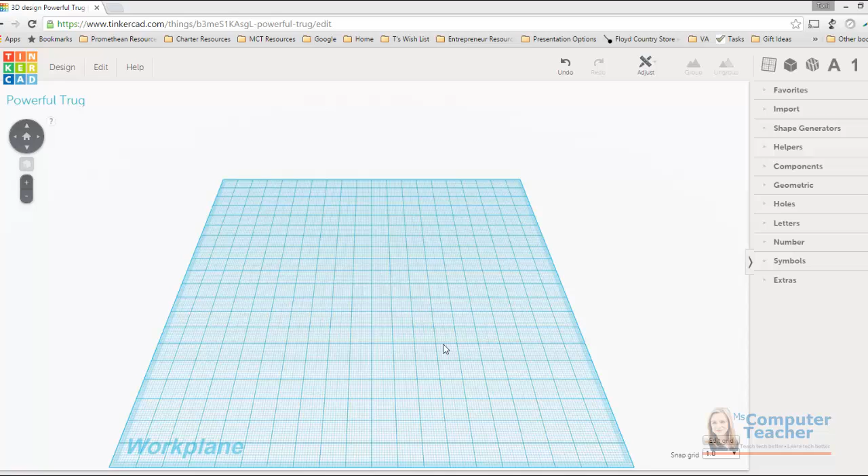Now that we know how to log into Tinkercad and we have explored the Tinkercad interface, we can go ahead and start creating our box. So the first thing we're going to do is come over here in the Shapes panel and grab our box. We can click this down arrow for geometric, or we could click up here. I'm going to grab the box and drag it onto the work plane.

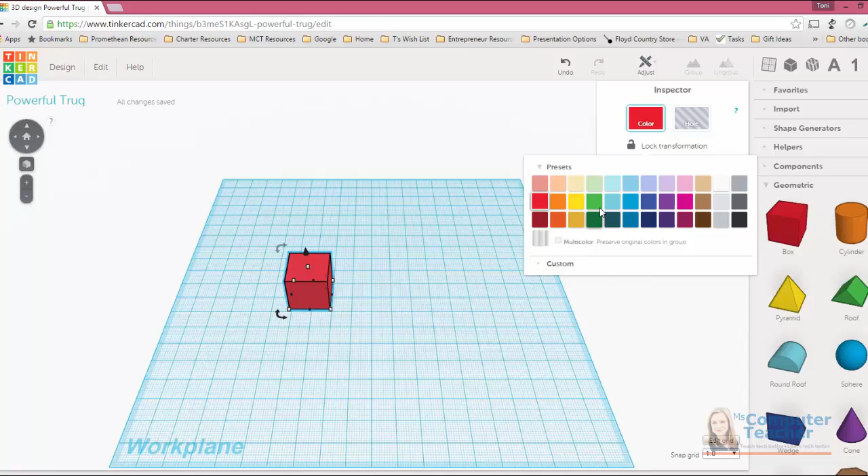Notice in the inspector bar, you can change your color to anything that you want. Let me change it to a color that contrasts a little better with the work plane. You can also do a hole. We're not going to do holes in this lesson, but we will look at that in the next lesson.

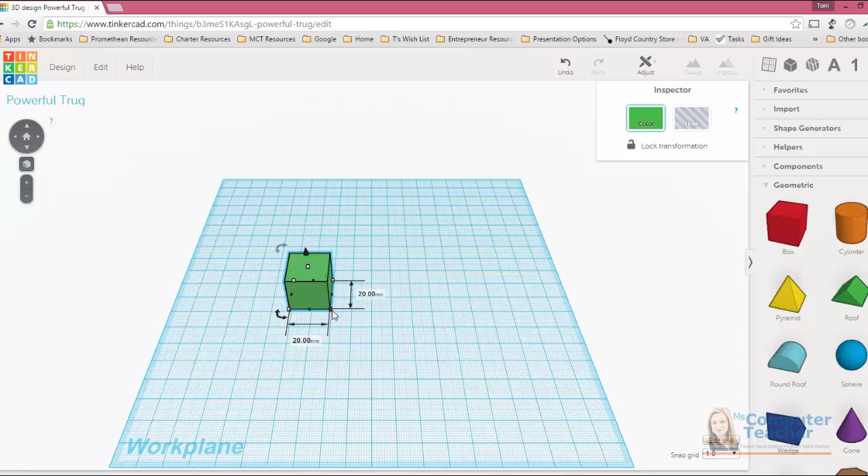For this particular box, we are making one that is a great size for printing, but it's also a good size for holding gift cards, for example, and little trinkets. Ours is 7 centimeters by 10 centimeters. Centimeters need to be converted to millimeters because we are working in millimeters on our snap grid. So let's go ahead and do 100 millimeters across, which is equal to 10 centimeters.

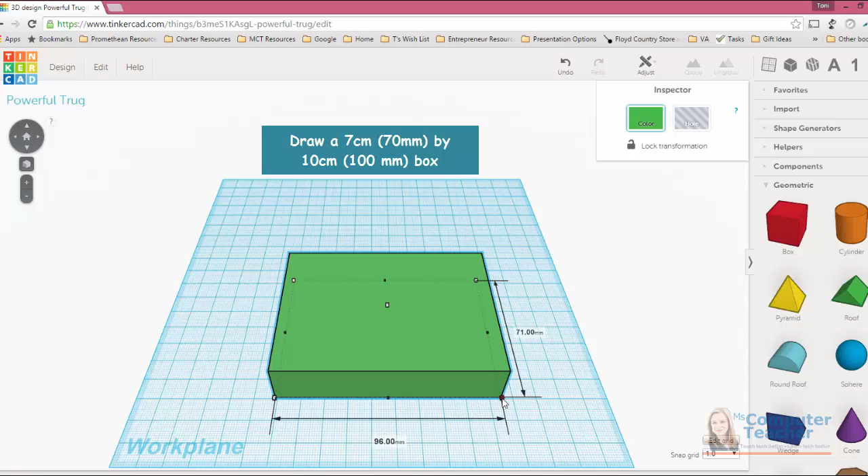And then the other dimension is 70 millimeters, or 7 centimeters. So almost there, may require a little fine tuning. There it is. I have a 70 millimeter by 100 millimeter box.

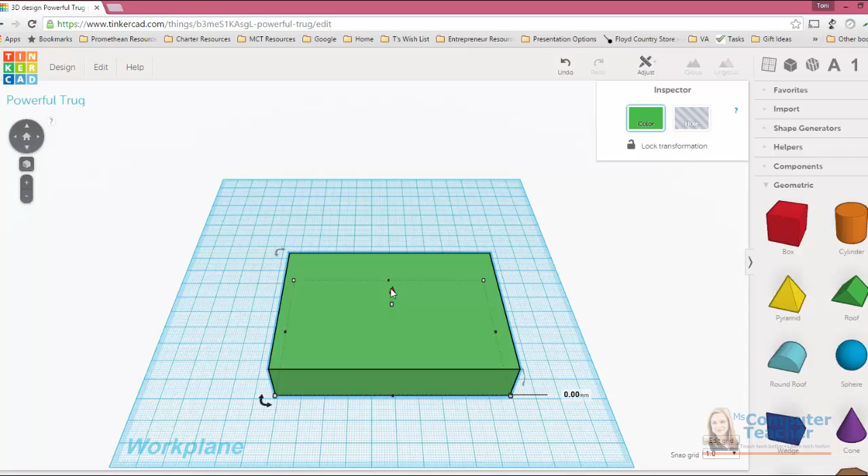Now, one thing that we must address before we move on is how to make this box less deep or more deep. So there's a way that we can adjust the depth. If I click my left mouse button, and if I click my right mouse button, I can drag this work plane around and get like a 360-degree view of my shape.

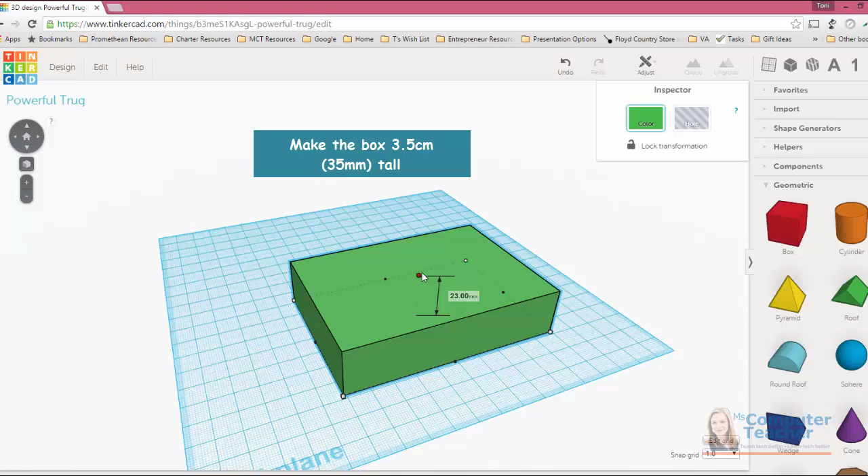Now, when I do that, I can see this little cone here and this one here. This pulls up or down our box. And for us, we want a box that is 3.5 centimeters deep, or we can say 35 millimeters. So I'm going to go ahead and pull this up to 35 millimeters.

Now, if I had grabbed the cone, notice when I hover over it, I get that 0 millimeters right down here in the bottom right corner. If I click it and drag it, what does it do? I'm going to rotate using my right mouse button, and I see a shadow appear underneath, and that means that the object is no longer sitting on the work plane. It has instead been lifted above the work plane.

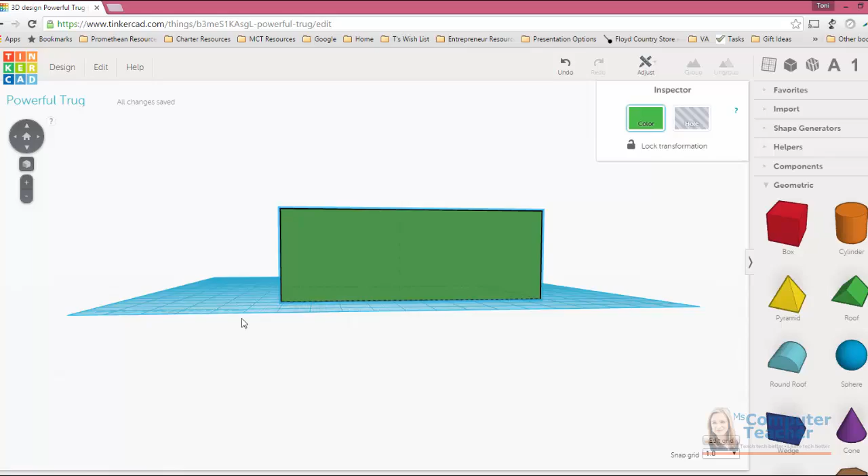So I'm going to grab our cone, and I want that to say 0 so that we have a beautiful 7 centimeter by 10 centimeter by 3.5 centimeters deep box. And that completes this lesson. In the next lesson, we are going to cut out part of this box using the hole shape.